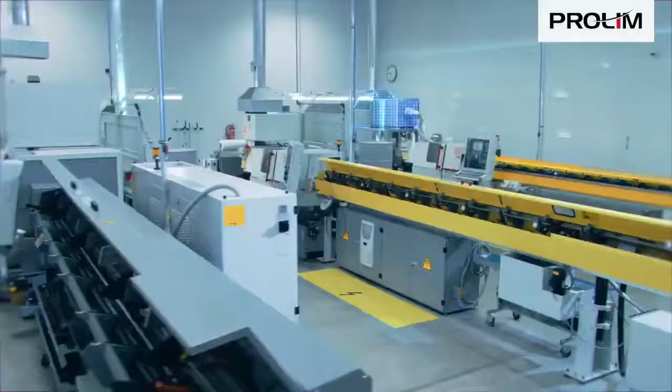With the 2021.1 release of Simcenter System Simulation Solutions, Siemens Digital Industries Software continues to support your innovations. This update helps you explore all the possibilities faster and model the complexity for better design with always tighter collaboration and integration.

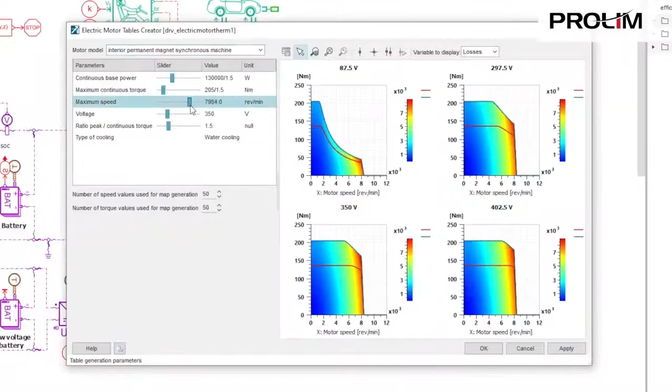Simcenter Amesim 2021.1 comes with various new capabilities for vehicle electrification, such as power electronics thermal modeling, 2-speed electric vehicle gearbox parameter optimization, and torque vectoring design from a vehicle dynamics point of view. These new features help drive systems integration with key electric vehicle attributes.

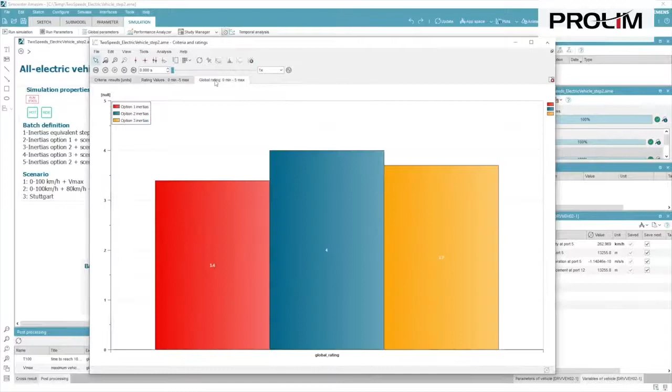This version also brings the new Simcenter ROM Builder software for creating reduced order models. It offers the possibility to explore many more conditions and generate models for real-time or controller synthesis.

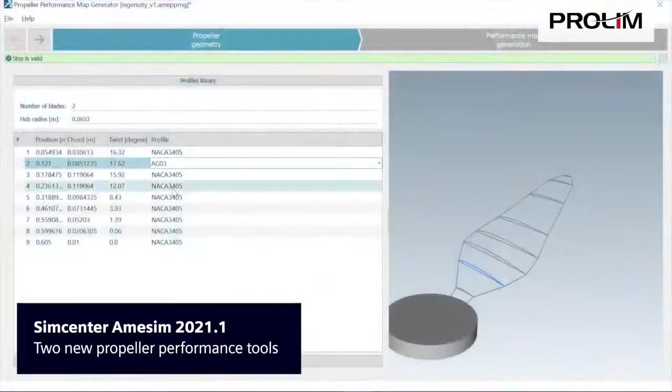In the aerospace and defense area, Simcenter Amesim 2021.1 offers two new propeller performance tools, allowing a faster and earlier assessment of flight performance to support development of propulsion systems for innovative flying platform designs.

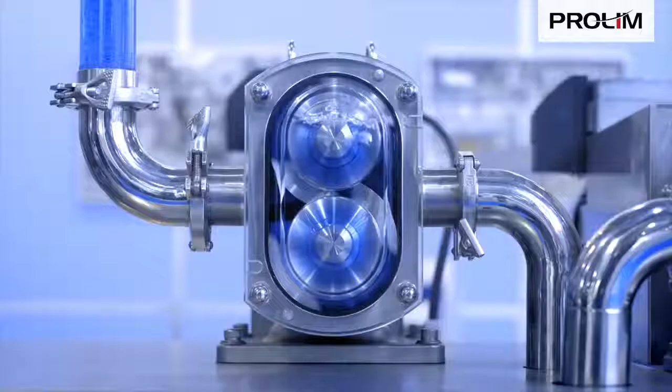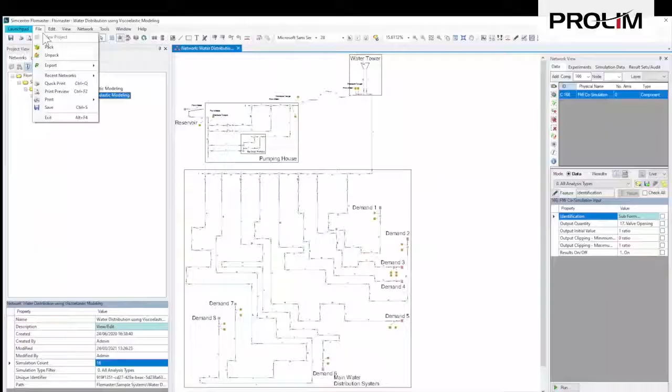Simcenter Flomaster 2021.1 offers new capabilities to ensure digital continuity and to model complex physics. Users can export the fluid system model as a cross-platform portable FMU to be run in larger integration platforms without the need to install Simcenter Flomaster, or as an executable digital twin for real-time monitoring of plant operation.

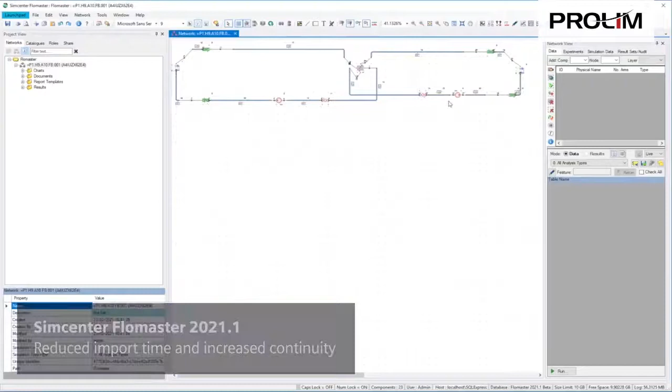The comprehensive solution for importing process and instrumentation diagrams, or P&ID, from Comos and NX drastically reduces model setup time and ensures digital continuity throughout the life cycle of the asset.

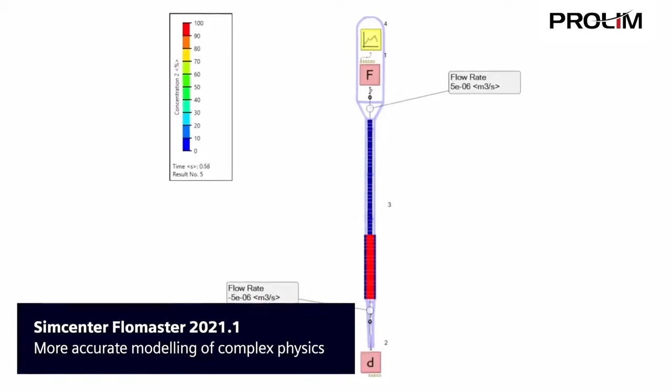A new pipe model that uses particle tracking methods enables accurate modeling of complex processes such as priming, depriming, batching, purging, and cleaning of piping systems with both Newtonian and non-Newtonian fluids.

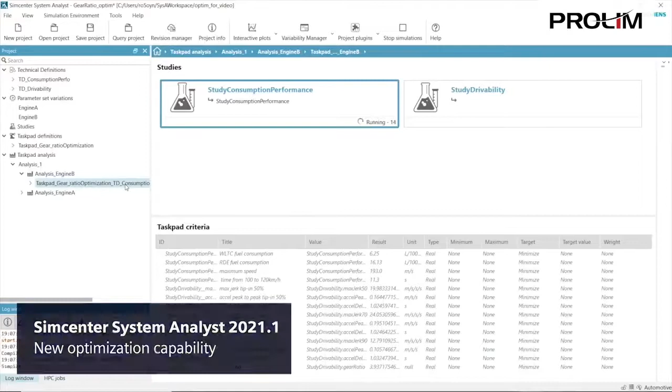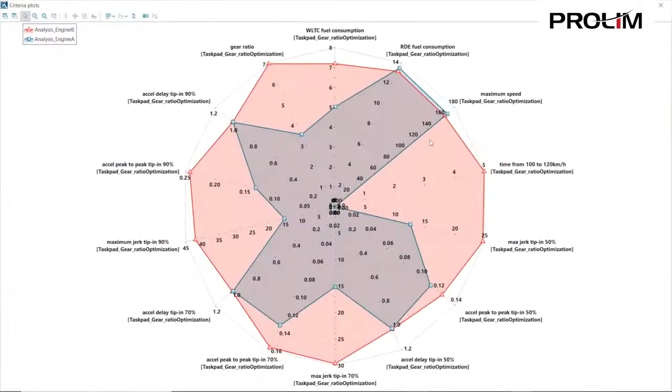Simcenter System Analyst 2021.1 is reinforced with the capability to execute optimization loops within a multi-criteria analysis workflow. A typical application of such capability is to perform a fuel consumption or performance optimization before evaluating drivability criteria and obtain the best result of multi-criteria analysis over several technical definitions.

Simcenter System Architect 2021.1 automates the creation of a simulation architecture from a SysML representation. This reinforces the interoperability between system engineering and system simulation.

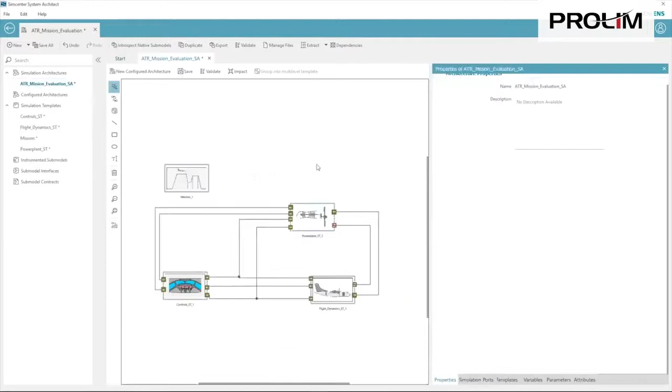Finally, Simcenter Web App Server 2021.1 comes with significant enhancements for better usability, such as units management, result comparison, and parameter layout customization.

And these are just a few examples. To discover all the new capabilities of Simcenter System Simulation Solutions 2021.1, please visit the Simcenter community or our website using the links provided.

We will soon unveil a new product, Simcenter Studio. Stay tuned to discover this new tool, allowing system engineers to make faster, better architecture design decisions without missing unexplored opportunities using AI-based methods.